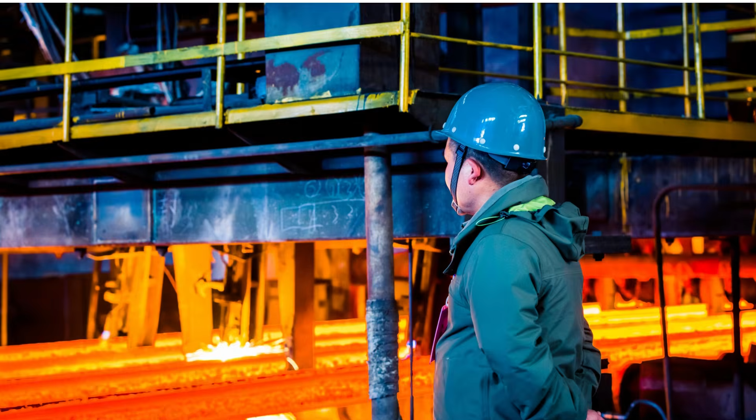What are the realities that we must address? Across Africa and beyond, I am constantly approached by metallurgists who say: number one, I was never properly trained to develop a flow sheet. Number two, I struggle to confidently close a mass balance. Number three, I can operate the plant, but I cannot model it. Number four, I don't know how to justify my recommendations technically.

These are not incompetent professionals, they are under equipped professionals. Many graduates leave university with theory, but limited exposure to structured flowsheet development, rigorous mass balancing, and simulation based design. In any industry, there is often no one with the time to mentor them deeply, so they struggle silently.

But what is the cost of not knowing? When a metallurgist cannot confidently develop a comminution flow sheet, size equipment logically, close and reconcile mass balances, validate plant survey data, quantify circulating loads, and model throughput versus grind size trade offs, these consequences are serious. They include design flaws, misinterpreted plant data, inefficient grinding circuits, poor recovery optimization, weak capex justification, and lost confidence in technical meetings, and ultimately lost value.

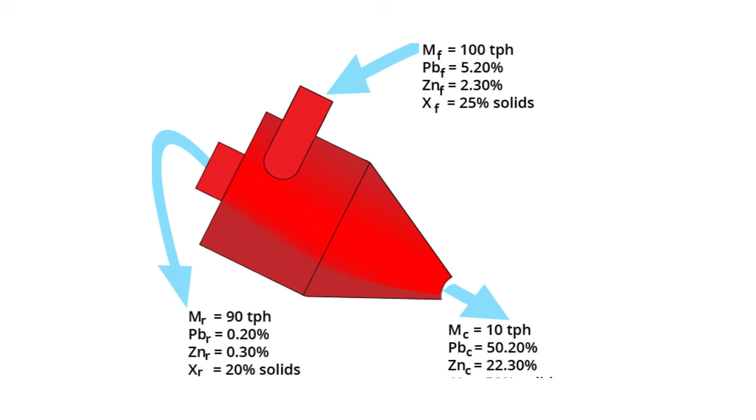Why our mineral process modeling and simulation course in JKSimMet is a game changer. JKSimMet as a software was developed through decades of research by JKTech from the University of Queensland, which provides a structured scientific framework to: number one, build grinding circuit flowsheets correctly; perform rigorous mass balancing; validate plant survey data; simulate operational changes; as well as predicting performance before implementation.

But here is the key: software alone does not solve the problem, training does.

So what do we do at PATFIO Consulting? At PATFIO Consulting, we specifically target young metallurgists who lack structured flowsheet training. We target plant metallurgists who are struggling with mass balancing. We target engineers who are preparing for feasibility studies. We target also operations teams considering plant upgrades. We also target African professionals who were never given simulation exposure.

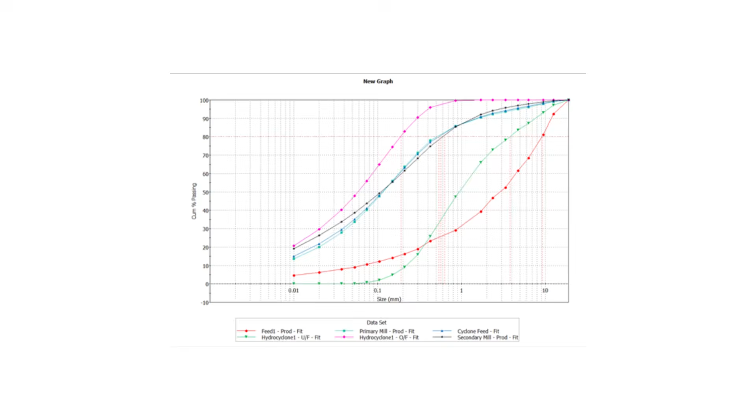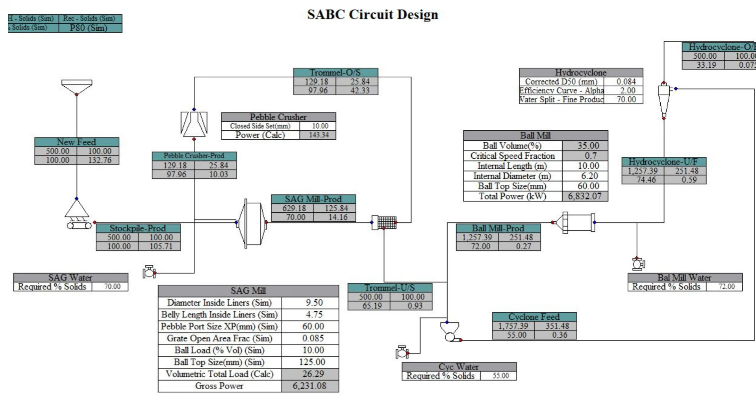Ladies and gentlemen, the ore body may be complex, the circuit may be unstable, the budget may be tight, but with the right tools and the right training, performance becomes predictable. Invest in your people, equip them with mineral process modeling and simulation trainings. Train with PATFIO Consulting, because in modern mineral processing, knowledge is not power. Applied simulation is. Thank you.

Expect to get into the course, the prerequisites, and also all the expectations about the course. So this course is the basic course for JKSimMet, which is 100% hands-on and industry focused. This is an online training designed for process engineers, plant metallurgists, simulation professionals, and everyone who is interested in simulation technology.

We'll be focusing on mastering practical modeling of crushing, screening, grinding, and classification circuits. This course equips you with real-world simulation skills to improve plant performance, troubleshoot bottlenecks, and design efficient mineral processing flowsheets.

Why this course? You'll be given the opportunity to learn directly from real mining and mineral processing case studies. You'll be given a chance to master JKSimMet using step-by-step guided simulations. You'll be able to acquire skills that immediately translate into plant improvements. You can boost your career prospects in comminution, circuit design, and optimization. Our aim is to develop your confidence in building complete circuits from scratch.

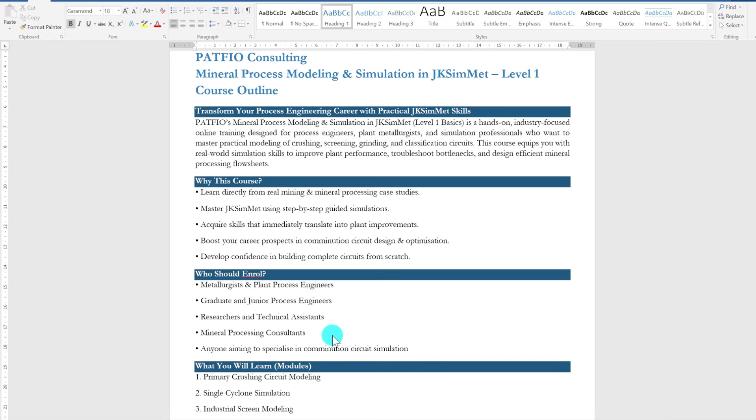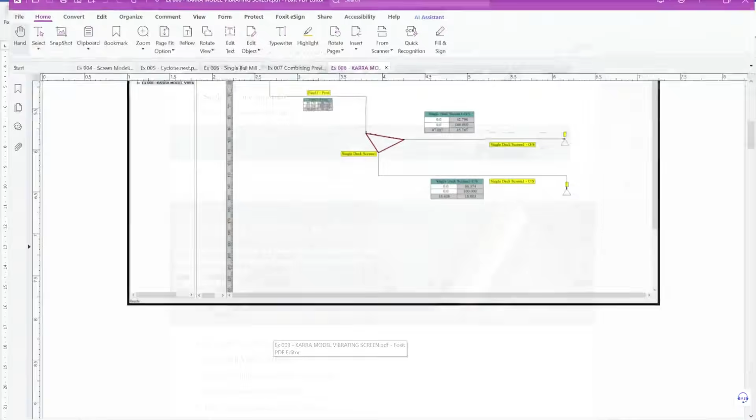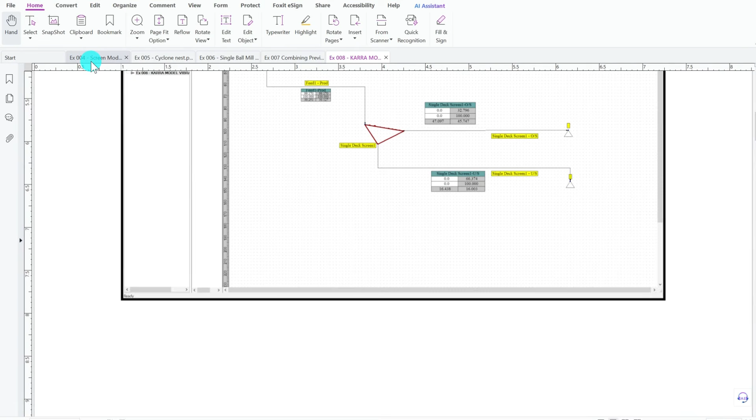I'm going to go through the modules that are going to be included in this course. This course is made up of practical, instructor-led tutorials that all the delegates or trainees are supposed to follow step by step using their own JKSimMet version. These are some of the case studies embedded in the course.

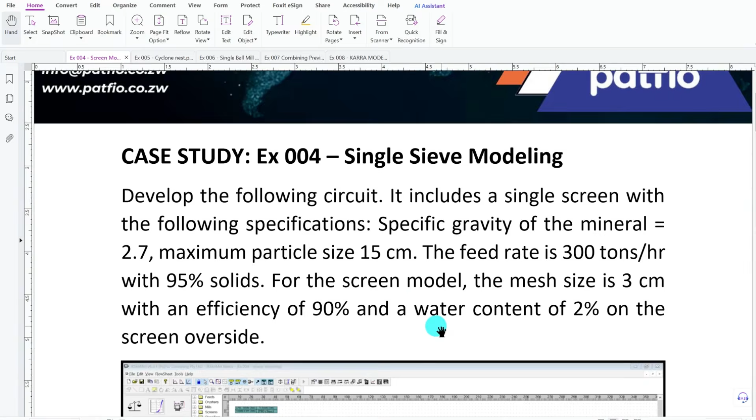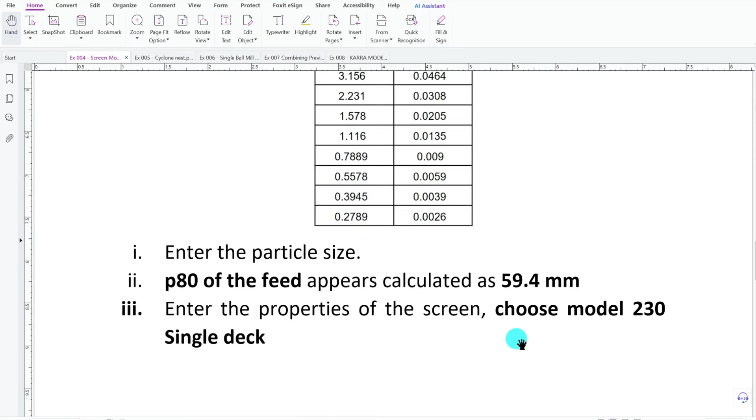We have got the single sieve modeling, so preliminary data is given to the trainee to configure, and some sets of instructions are also provided.

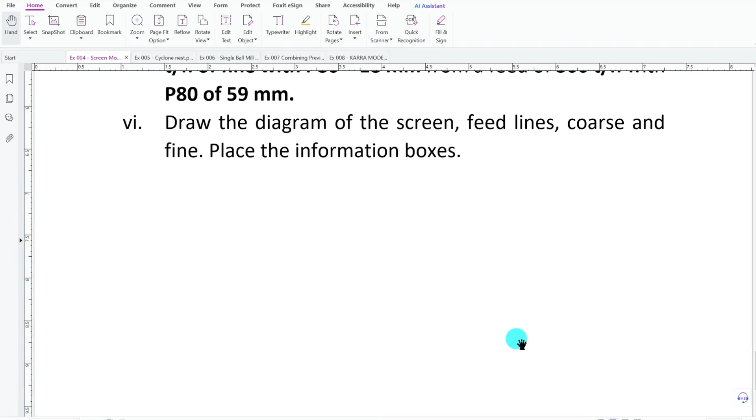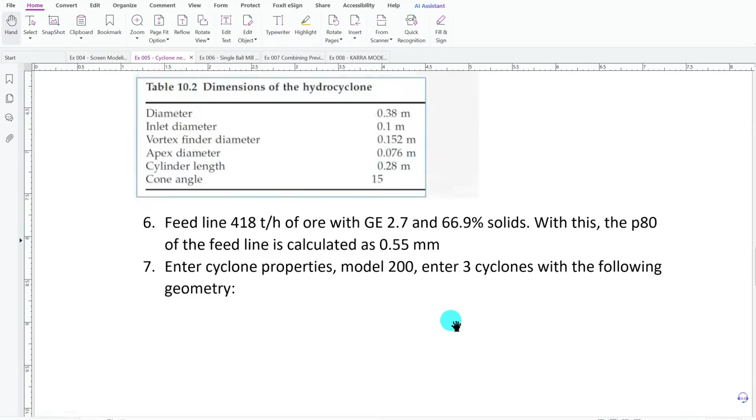Another case study is on the cyclone modeling in JKSimMet. We also have got ball mill simulation.

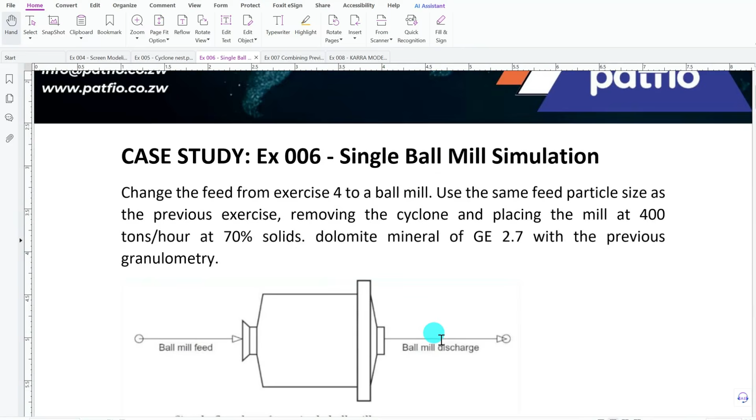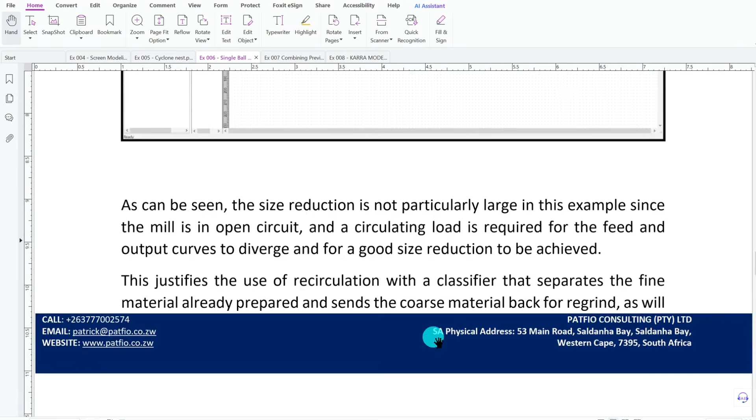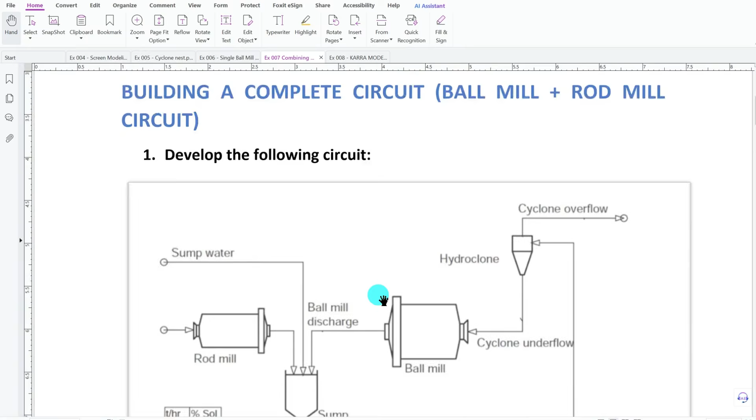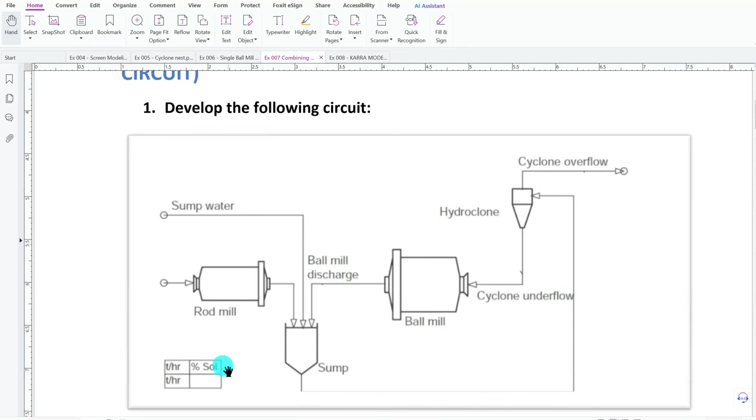Our aim is for the trainee to get a feel on all the models or algorithms that are in JKSimMet for crushing, for milling. So we will be able to expose you to the models and how you can apply these models to solve some problems. Then you can also proceed with building some flow sheets whereby we combine the ball mill, the hydrocyclones, as well as the rod mill.

You also find materials to download. So our team will also provide you with JKSimMet files that you can download and compare with your exercises.

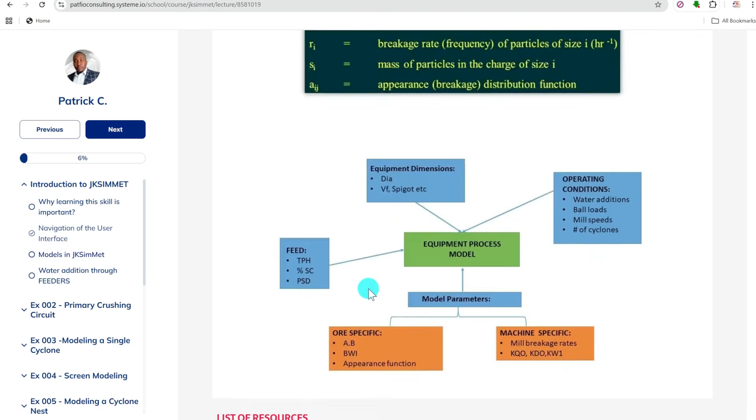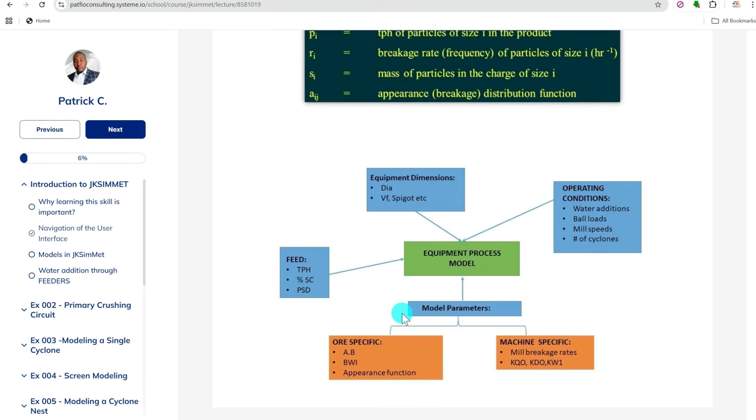During the course of the training, you are supposed to replicate these videos so that you compare the results that you get, and you'll be able to discuss with the instructor on the results that you get. You also have access to download the training materials through the links provided, and you'll also be given a chance to have assignments which can be submitted also within the learning management system.

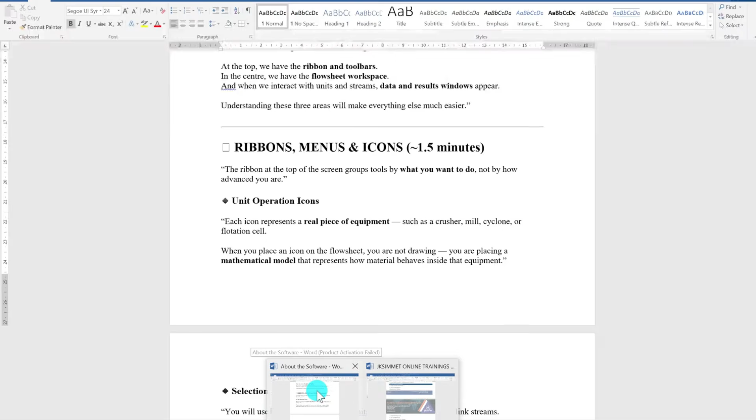So these are some of all the exercises that are embedded in this course. These exercises are meant to build your confidence in usage of JKSimMet, navigation of the software, and also practical application of the software. Our course is coupled with, I've talked about the learning management system, which you can access at any given time.

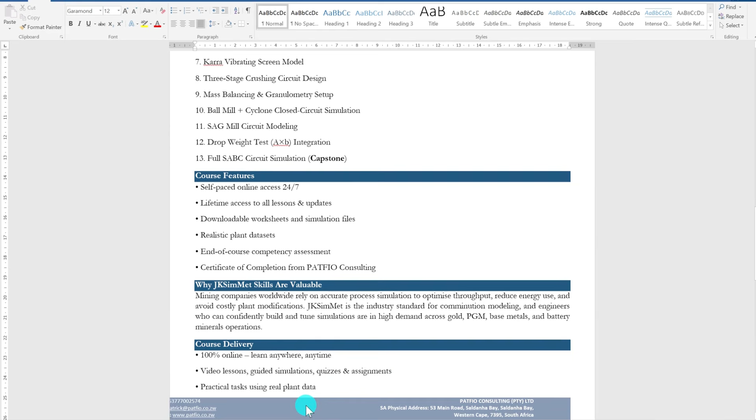But also you have the opportunity to book some live sessions with our instructors. We call them question and answer sessions, whereby you need clarity. You can always book with the instructors for one-on-one sessions.

One of the advantages of this course is that it is self-paced. It's targeting people who also have got tight schedules, so you can self-pace the course, and you have got lifetime access to the lessons through the learning management system, and you can download all the worksheets and simulation files, and also some data sheets.

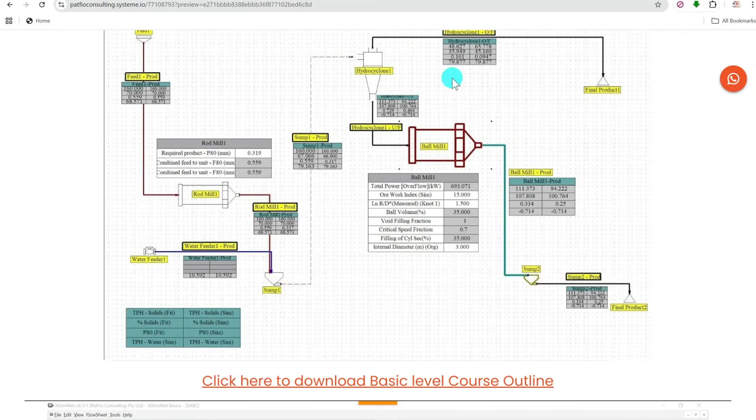PATFIO grants a certificate of completion, which is also accredited. PATFIO is a CPD provider, so you get the certificate which is accredited.

In terms of costing, the basic cost is going for 450, and level number 2, which is the advanced, is going for 550. Level number 2 is a build up on level number 1, and level 3 is the optional level, which is the coaching or projects focused coaching program.

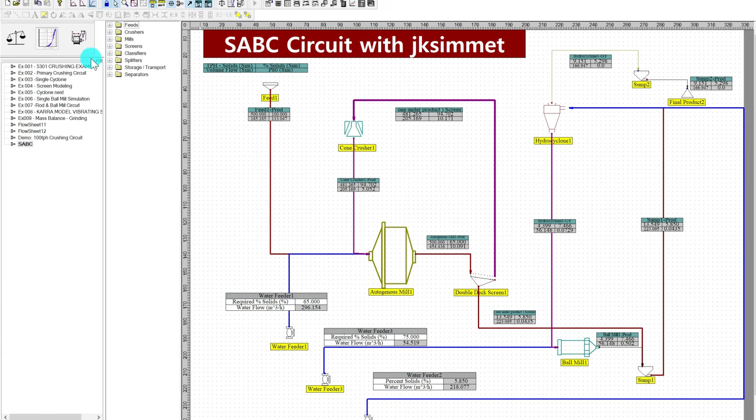So for those who don't know JKSimMet, PATFIO is using the latest version 6.3.1 of JKSimMet here to demonstrate the capabilities of the software and the exercises that you'll be expected to do on your own. So here, this is the JKSimMet screen.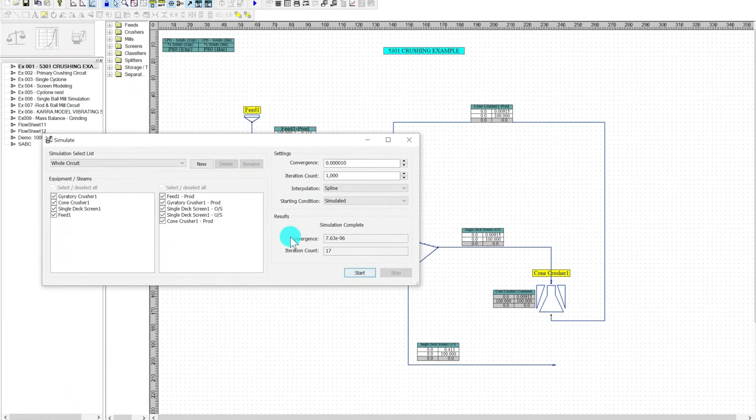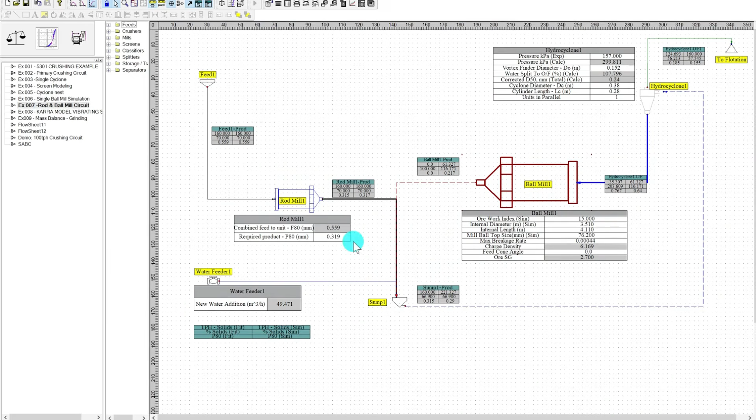This is the crushing example that our trainees are expected to do. We've got the primary circuit, cyclone exercise, screen model, ball mill simulation, rod mill and ball mill circuit, Karra model.

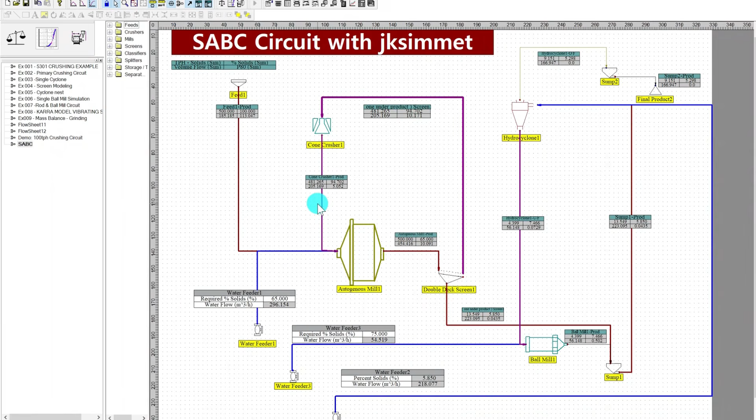The mass balance grinding, the SABC circuit with JKSimMet. So these are some of the exercises that we'll be doing with our software for level number 1.

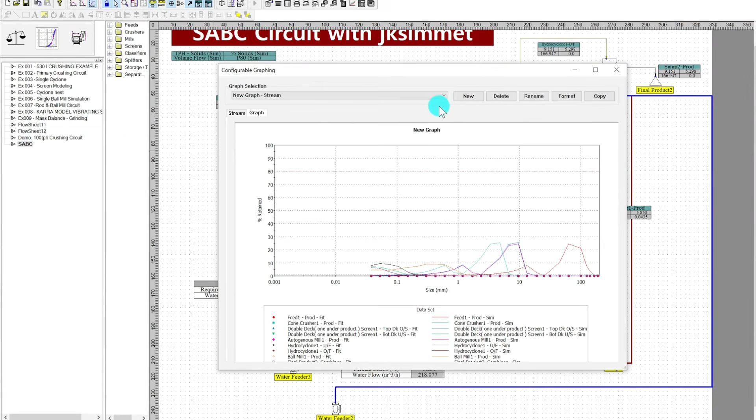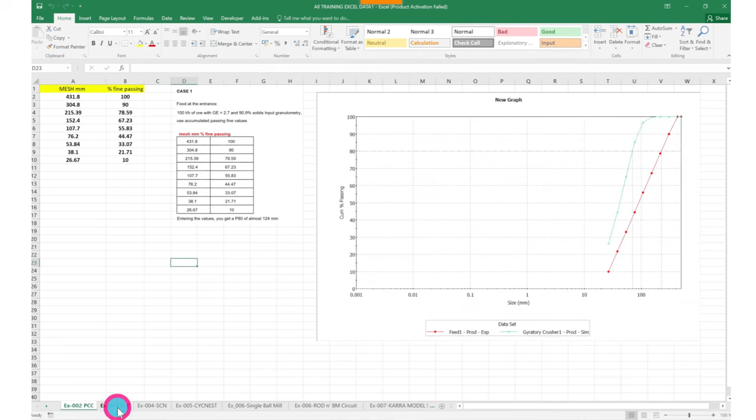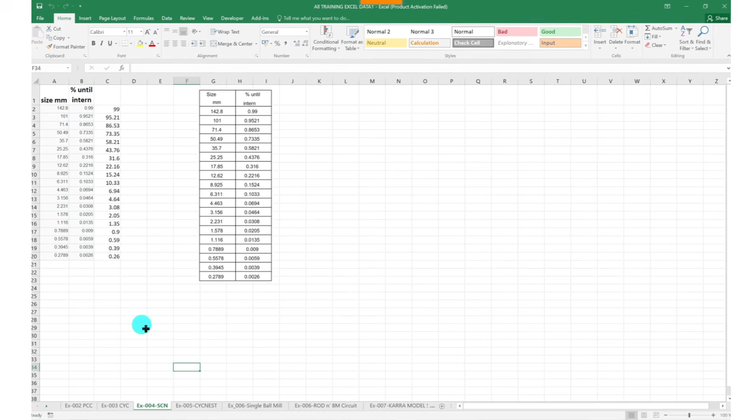Our trainees are also going to be provided with this spreadsheet, which has got all the data for the exercises, so that you can copy and paste as you configure your exercises. This one is in conjunction with the screen model exercise. This one is for the cyclone nest exercise.

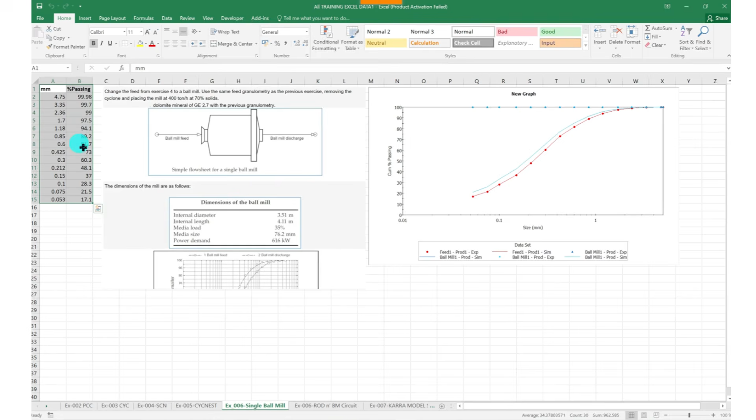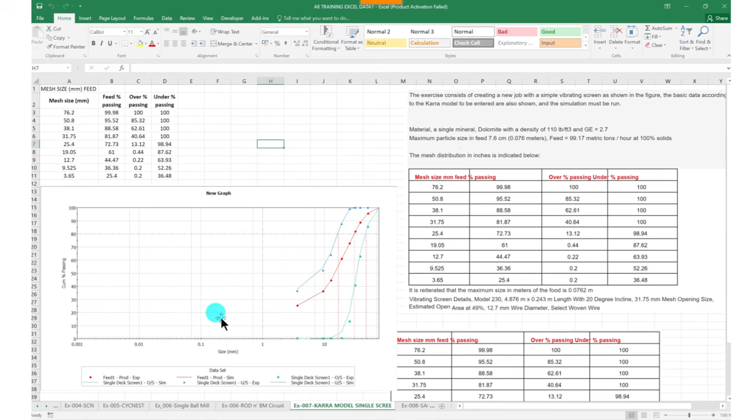This one for the ball mill exercise, and this one is for the rod mill exercise. For this one, for the Karra model. So we want to make it easy for our trainees, so that they will know how to prepare these spreadsheets for their practical usage.

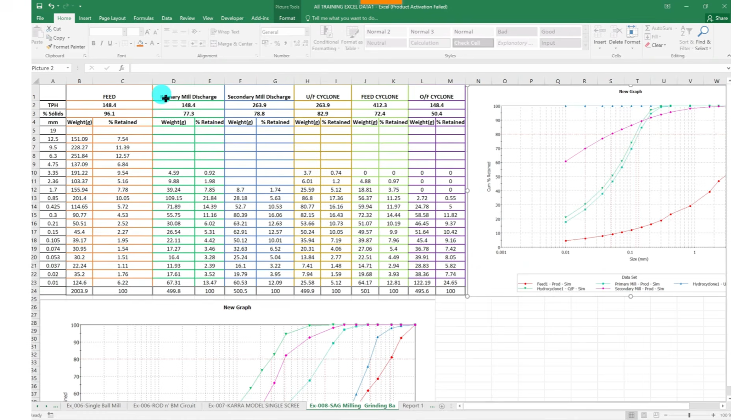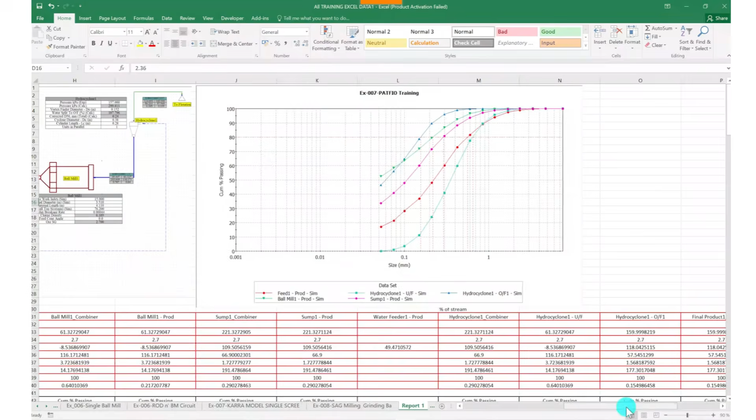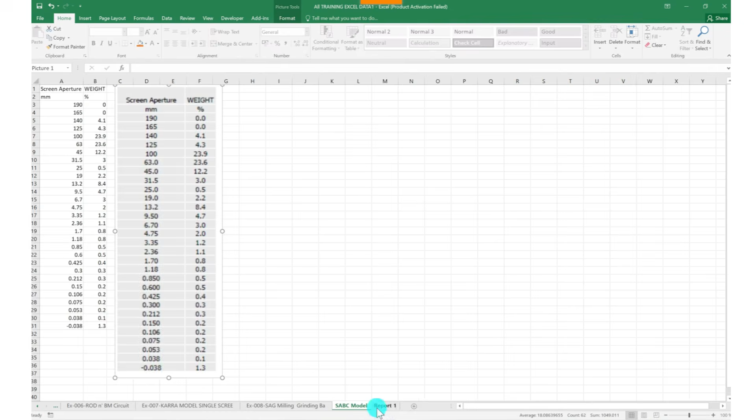So this one is for the SAG mill and grinding. This is the survey data, and some of the reports that are generated by JKSimMet. This one will be provided to all level 1 trainees. So this one will be a resource that will be in the learning management system, that our trainees will download and be able to use during the course of the basic level training.